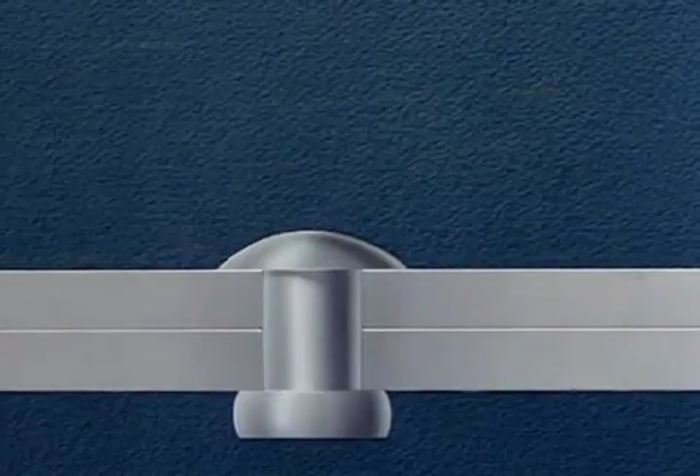With the ever-increasing demand for greater speeds in aircraft, it has been necessary to remove every possible projection from the outer surface of the airplane. Everything that would induce turbulence with its attendant drag must be reduced to a minimum. The use of a rivet, whose head is flush with the surface being riveted, eliminates the drag of the ordinary rivet head and thus aids in accomplishing our higher speeds.

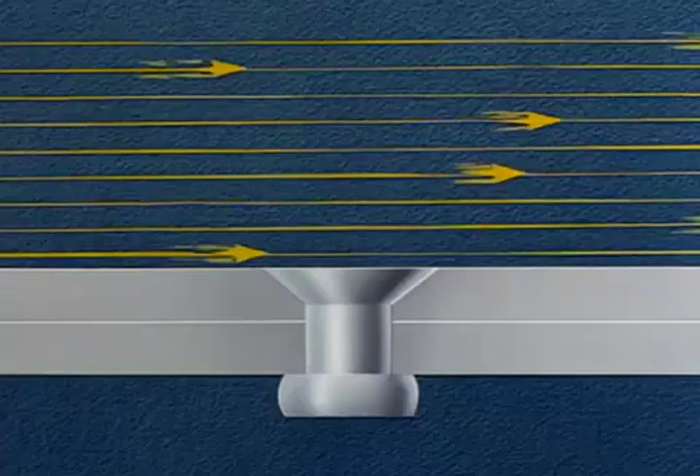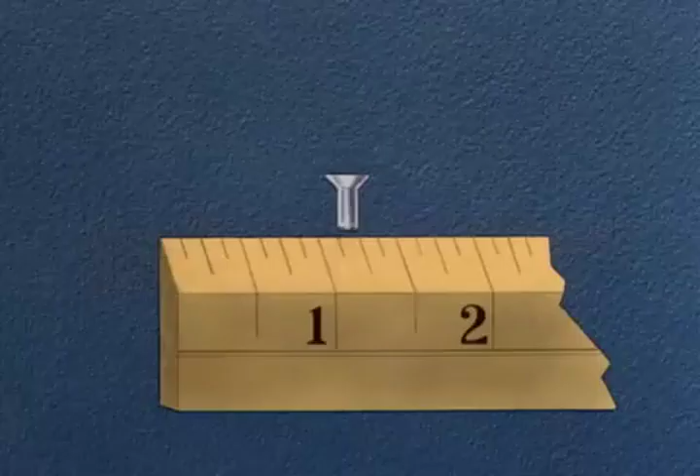The choice of method to be used in flush riveting is based on the thickness of the sheet next to the manufactured head. Let's assume we're driving a rivet 1/8 inch in diameter with a 100-degree countersunk head.

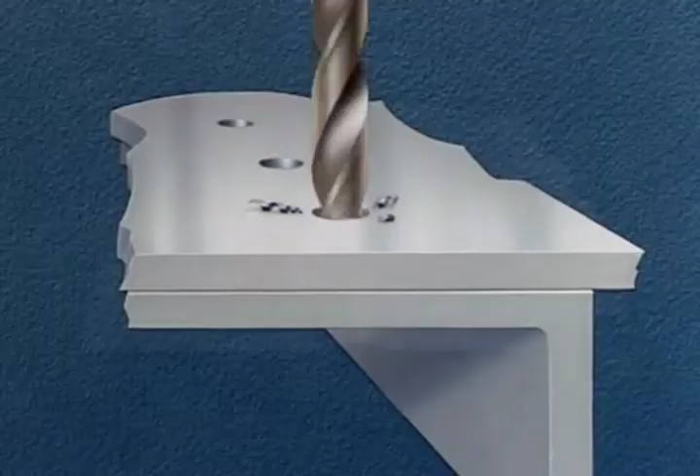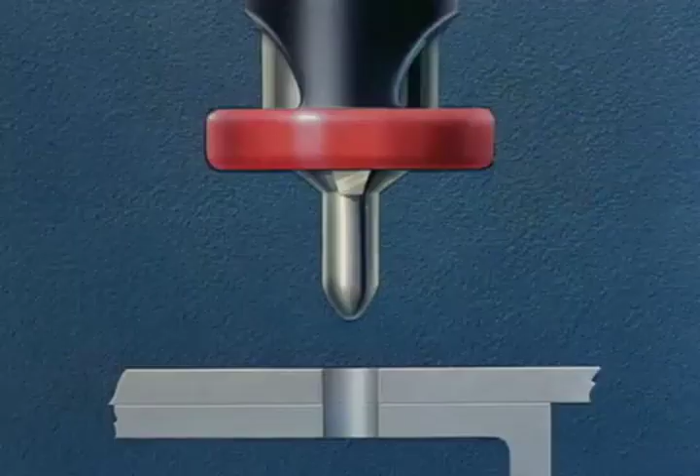Probably the best production method involves sheets of 40 thousandths thickness or greater. We start with the assembly of the sheets, drilling the correct size hole for the given rivet. We're using a 1/8 inch rivet, so we drill a number 30 hole, then countersink, using a special countersinking tool with a 2-flute cutter and with a 100-degree cutting angle and number 30 pilot.

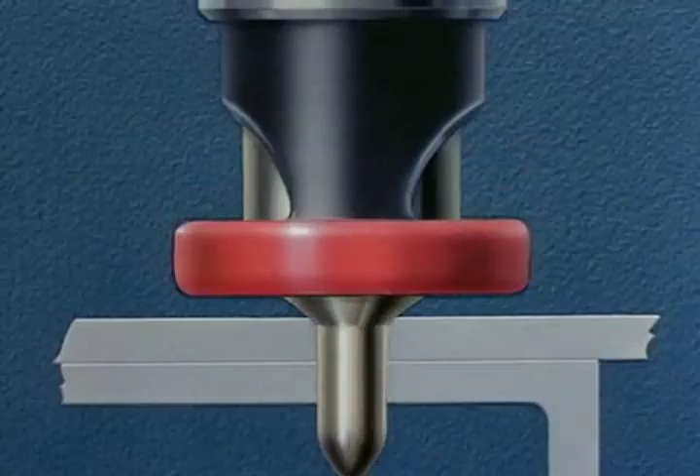Unless specific approval has been obtained from the stress engineer, the countersinking should not go through the first sheet. If sheets are properly clamped during countersinking, it is not necessary to disassemble them for deburring, which is a costly operation.

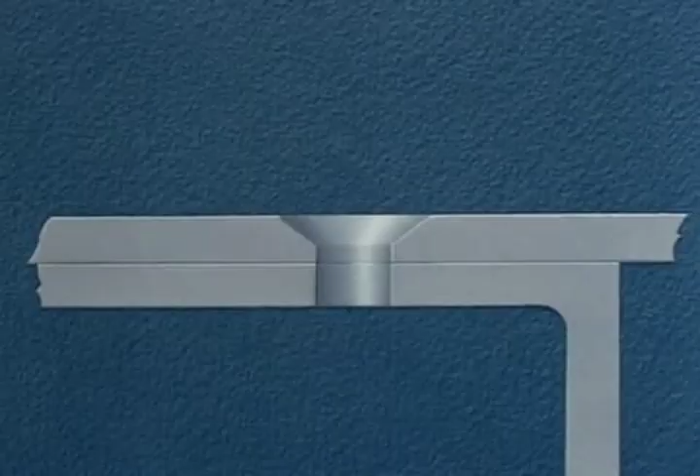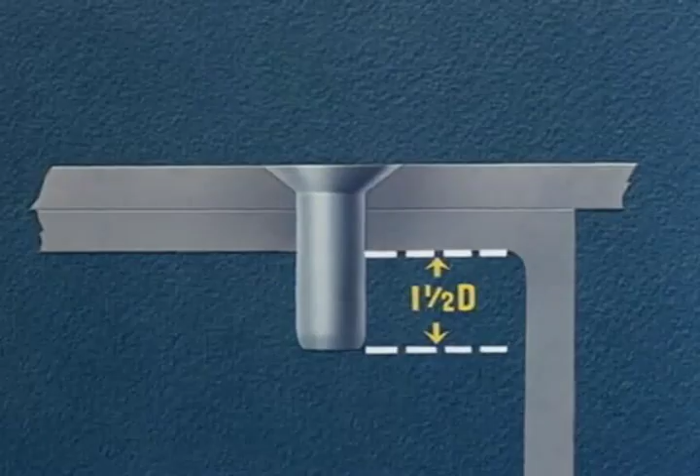Next, we insert the rivet, the length of which has been determined by adding 1 1/2 times the diameter of the rivet to the grip. The grip, as shown here in white, is equal to the total thickness of the material being riveted.

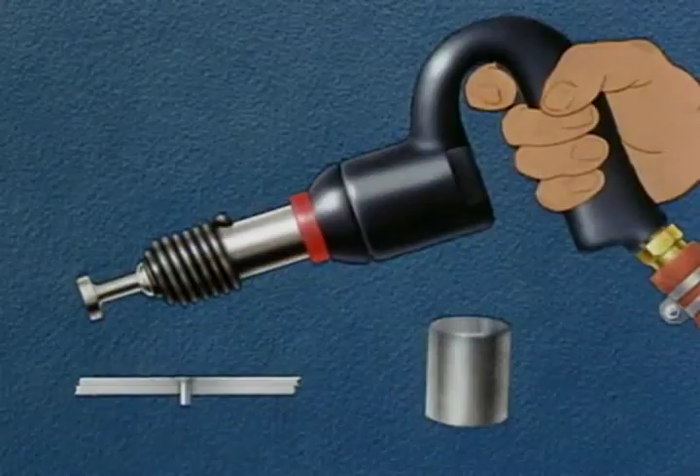A vibrating type air gun with a flush rivet set and a regular bucking bar may be used. Ordinary riveting technique will do for driving of this type rivet.

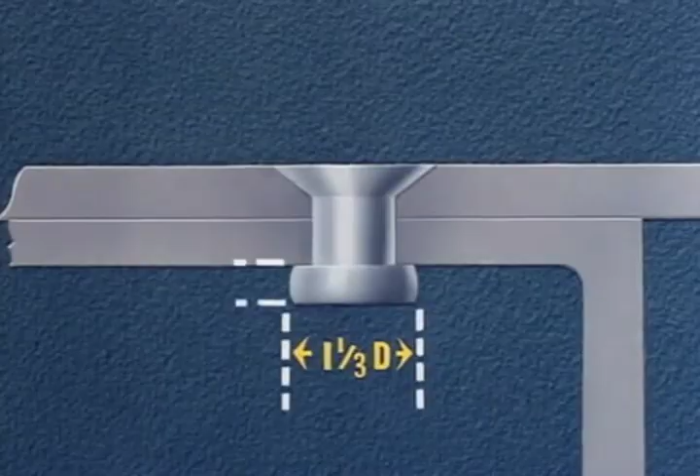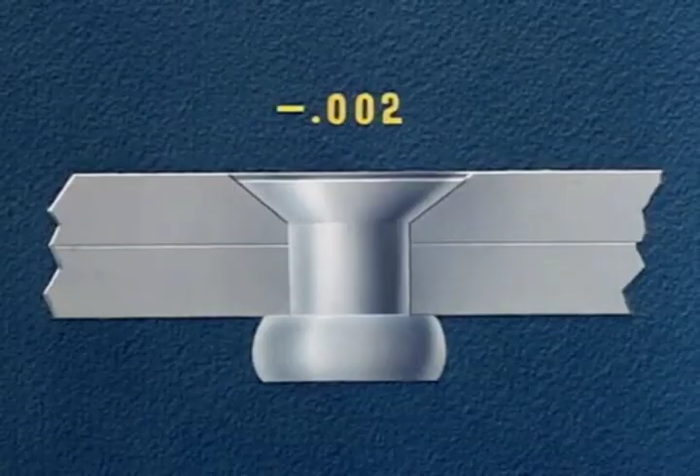The finished rivet should have a formed head, 1 1/3 times the diameter of the rivet and about 1/2 the diameter high. The flushness of the rivet, as determined by aerodynamics, must run in the neighborhood of plus or minus 2 thousandths.

We have just demonstrated the countersink method of riveting. This is a method used when both sheets are over 40 thousandths in thickness.

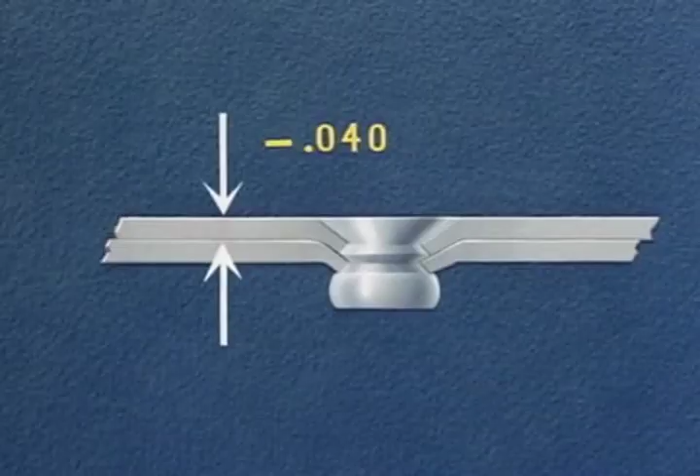Structural requirements make it necessary to dimple the sheet next to the manufactured head if this sheet is under 40 thousandths in thickness. This double dimple method is used for flush riveting thin sheets.

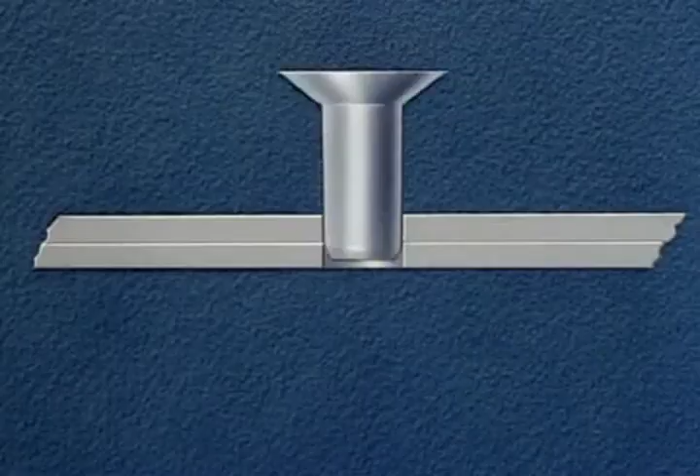Here again, we start with the number 30 hole and follow this with insertion of the rivet. The length of the rivet is again the thickness of the material plus 1 1/2 times the rivet's diameter. The driver uses a standard flush rivet set.

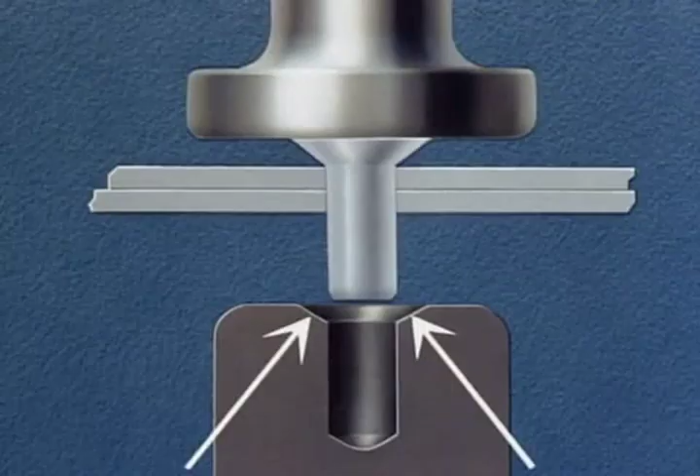The bucker uses a special dimpling set that has been adjusted by the tool department to give the correct angle and depth of the dimple. Using the rivet as a punch, we dimple the two sheets together into the dimpling set. The special dimpling set is removed.

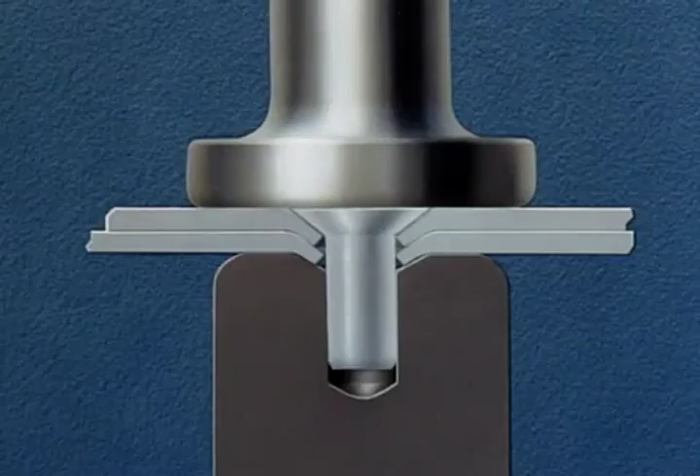The driver retains the standard flush driving set. The work then proceeds with the bucker using an ordinary bucking bar. Driving this type of rivet requires greater skill than was required in the previous method.

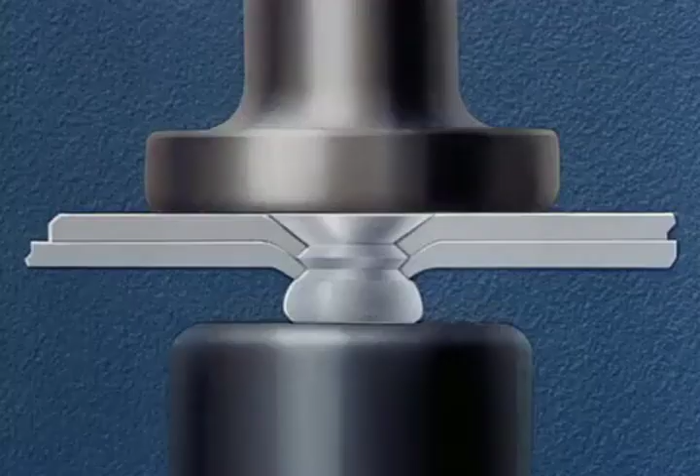Any clinching or offset of the rivet will cause the dimpled edge to crack. The rivet must be driven straight.

We have just shown the double dimple method of riveting. This is one of the methods used when both sheets total 40 thousandths or less in thickness.

A third method, used for riveting of slightly heavier gauges than in the last method, involves a separate dimpling of the sheets. Again, we start by drilling our number 30 hole. The sheets are then disassembled and machine dimpled separately on the squeezer.

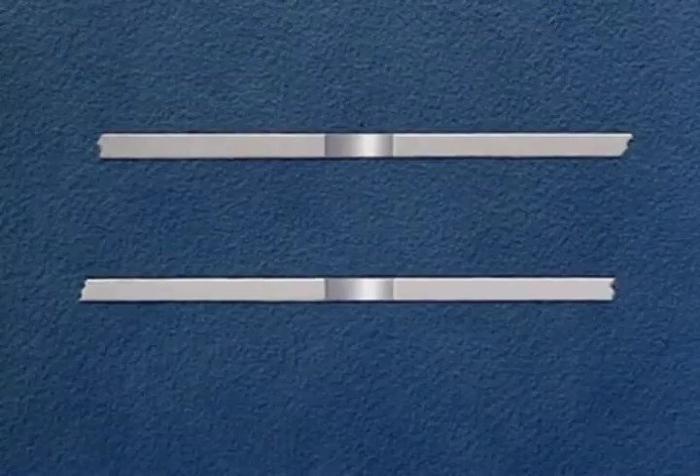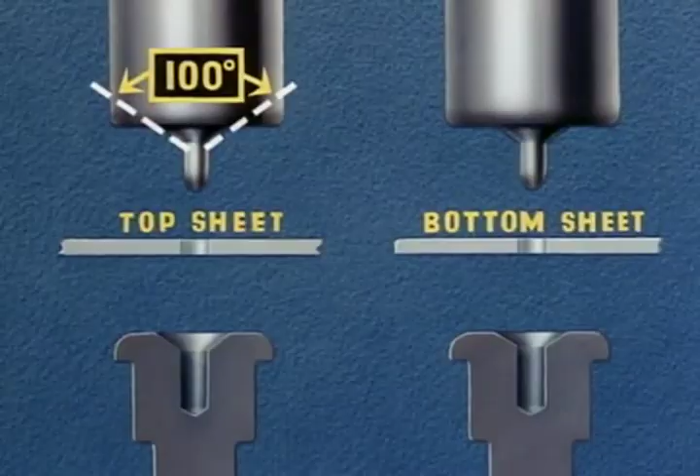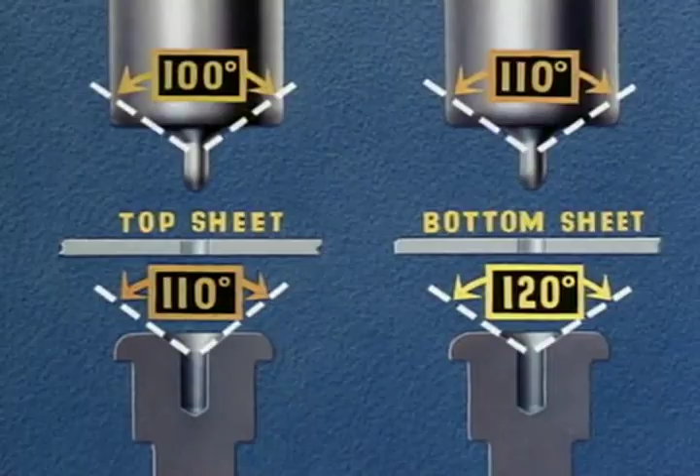Note the angle of the dimpling tools. The dimpling punch for the top sheet has an angle of 100 degrees, the same as the rivet head. The dimpling die has an angle of 110 degrees. The dimpling punch for the bottom sheet is also 110 degrees to correspond with the top sheet, and the dimpling die is 120 degrees. This difference is necessary in order to get a good nesting of parts.

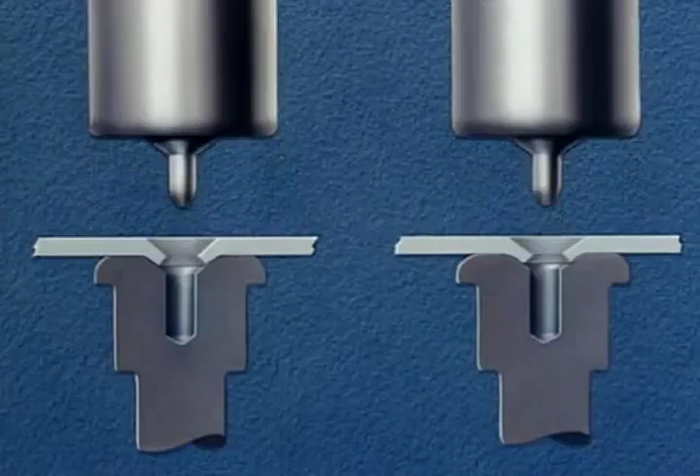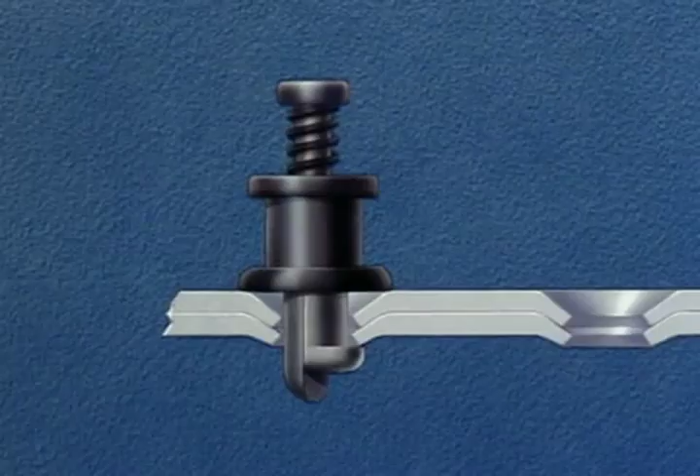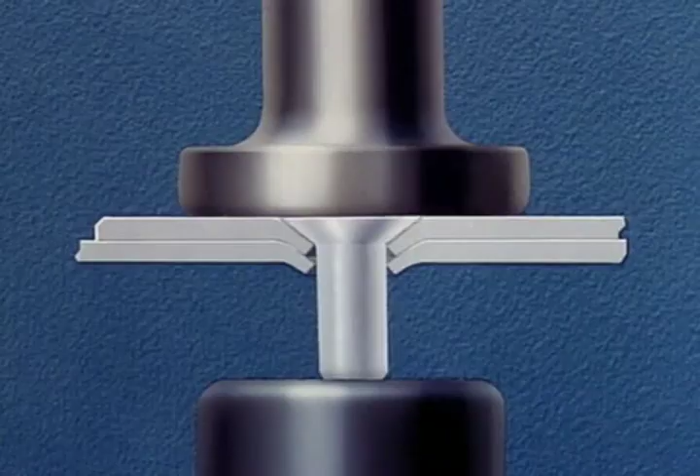Upon completion of the dimpling operation, the parts are reassembled. Sheet metal riveting clamps are used to hold the parts together until riveting is completed. The rivet is inserted, and from here on the work proceeds using a regular flush riveting set and the ordinary bucking bar. Driving this type of rivet requires the same skill on the part of the operator as in the former dimpled method. It is very important that the rivet be driven straight.

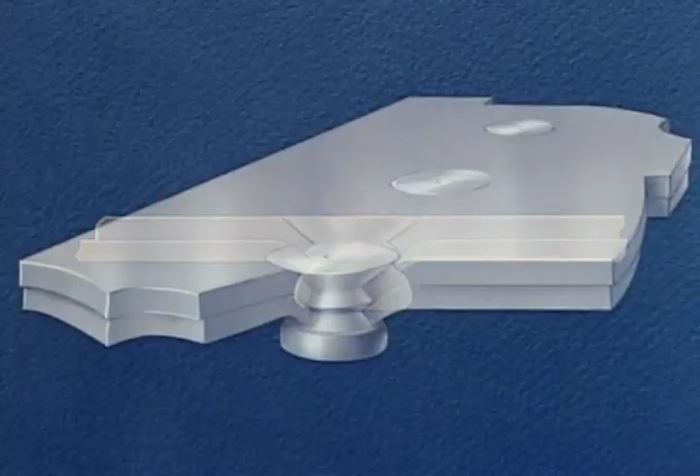We have just illustrated the pre-dimple method of riveting. The sheets were taken apart and machine dimpled separately on the squeezer. This is a method used when the sheets are too heavy for the double dimple process.

For sheet gauges where the top sheet is too thin to countersink and the bottom sheet too thick to dimple, we must use a combination of pre-dimpling and countersinking. The top sheet, being under 40 thousandths, must be dimpled. The bottom sheet, being over 40 thousandths, will be countersunk.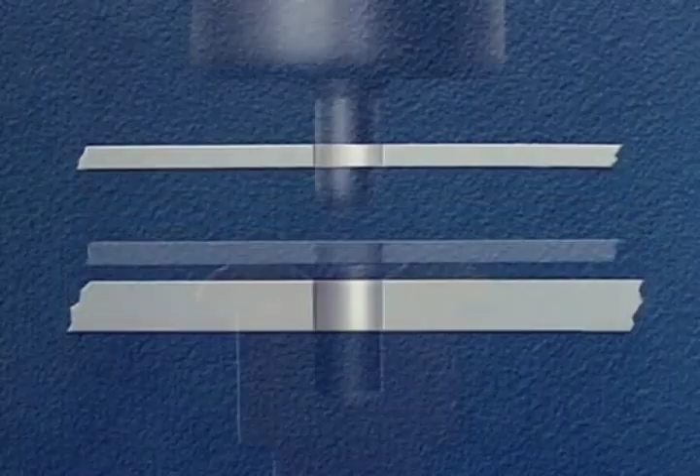Again, we start by drilling a number 30 hole. Sheets are disassembled and the upper sheet is machine dimpled using special dimpling tools on a squeezer-type machine. The bottom sheet is countersunk using the special countersinking tool.

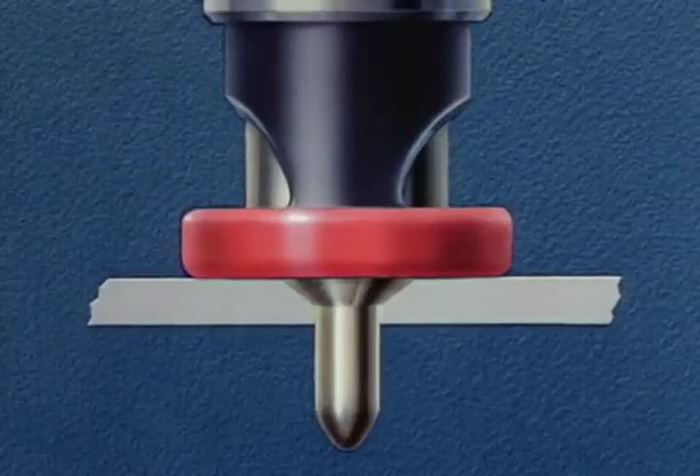The angles of the dimple and countersink are very important. The angle of the dimple next to the rivet must be 100 degrees because the rivet head is 100 degrees. The angle on the opposite side of the sheet is 110 degrees. The angle of the countersink is also 110 degrees.

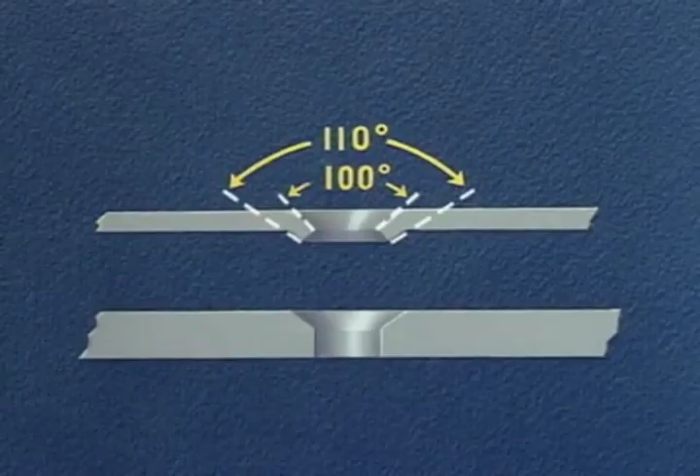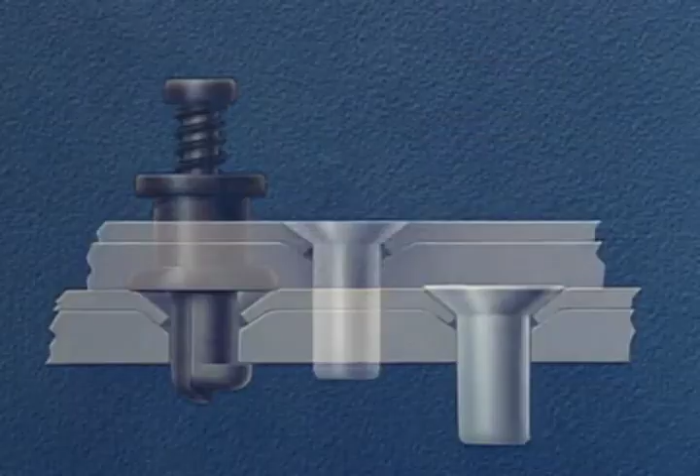Parts are reassembled using sheet metal clamps. Rivet is inserted. This is followed by driving the rivet using a standard flush driving set and bucking bar. This riveting technique is fairly simple because there is no lip on the under sheet to cause cracking or failure from clincher rivets.

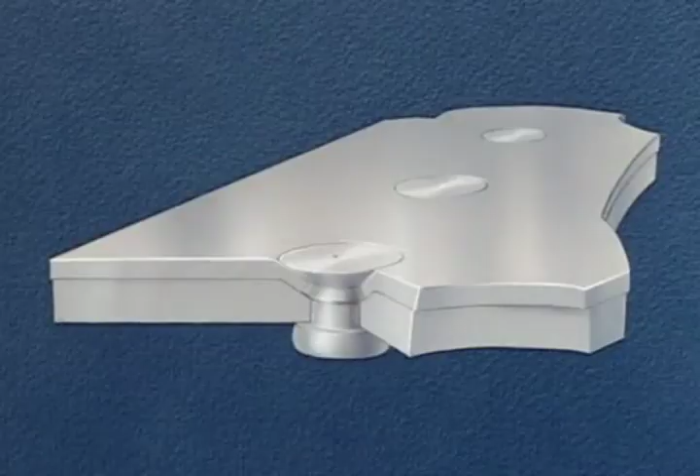We have just demonstrated the combined countersink and dimple method of flush riveting. This combination is used in cases where the sheet next to the rivet's manufactured head is too thin to be countersunk and the bottom sheet is too thick to be dimpled.

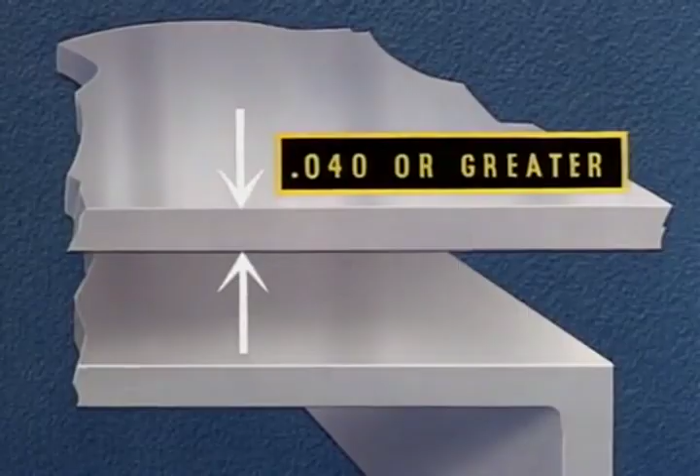Now let's review the four methods of flush riveting just demonstrated. Countersinking, used when the top sheet is 40 thousandths thickness or greater. The flushness of the rivet is obtained by setting it into a hole countersunk by a special tool.

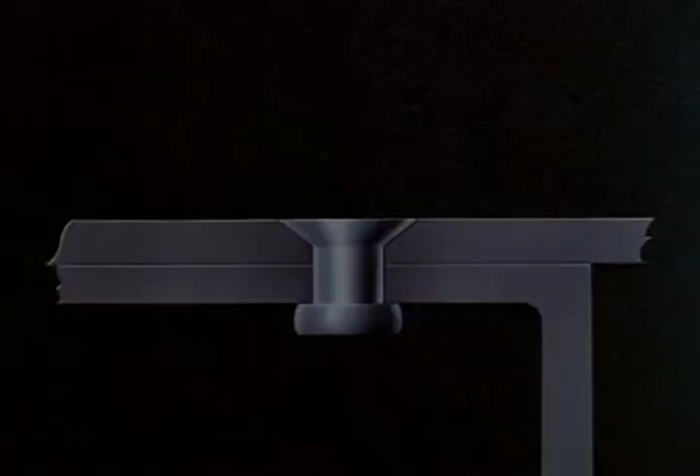Double dimpling, used when the total thickness of the sheets being riveted is 40 thousandths or less. In this method, the flushness of the rivet is obtained by using the rivet itself as the punch to form the dimple.

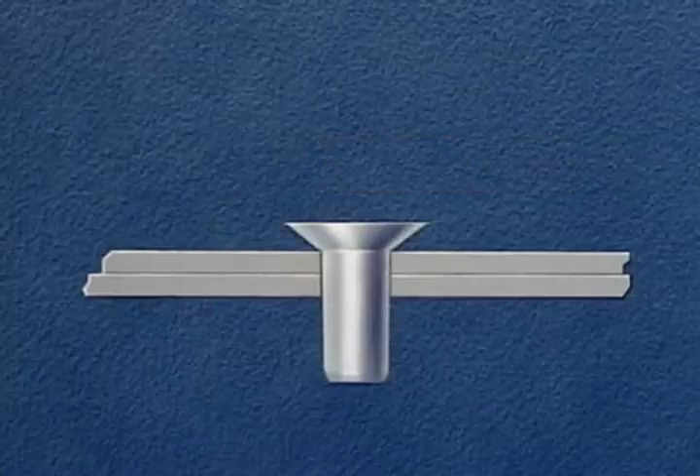Pre-dimpling, used when the top sheet is 40 thousandths or less, and the total thickness of both sheets is over 40 thousandths and under 90 thousandths. The flushness of the rivet is obtained by setting it into a dimple formed mechanically on a squeezer.

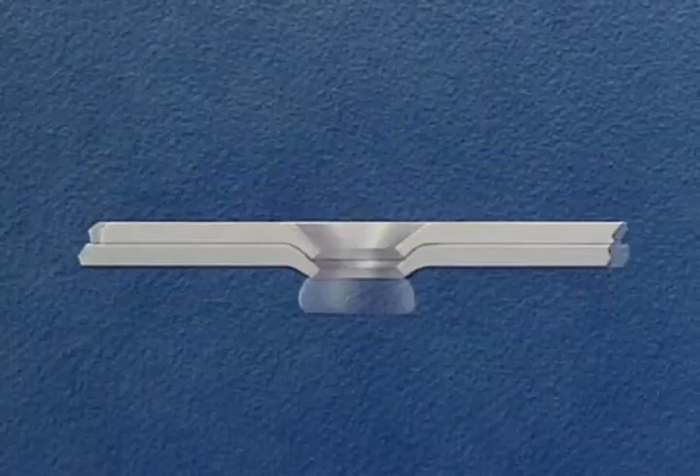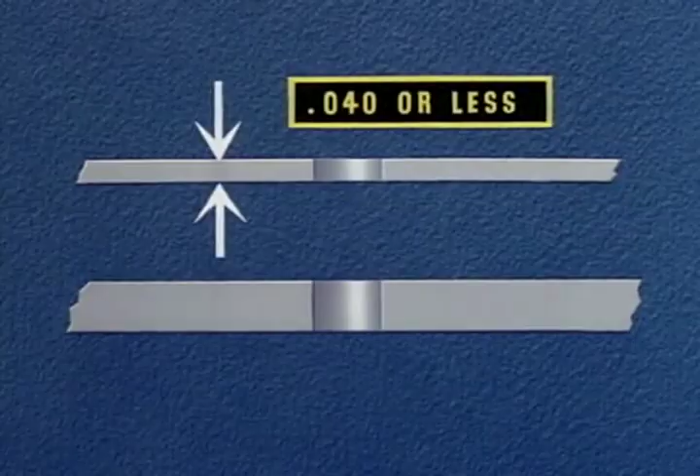Combination, countersinking, and dimpling, used when the top sheet is too thin to countersink and the bottom sheet is too thick to dimple. The top sheet is dimpled and the bottom sheet is countersunk.

The result obtained by each of these different methods is the same. The head of the rivet is flush with the surface so that the turbulence or drag is held to a minimum.